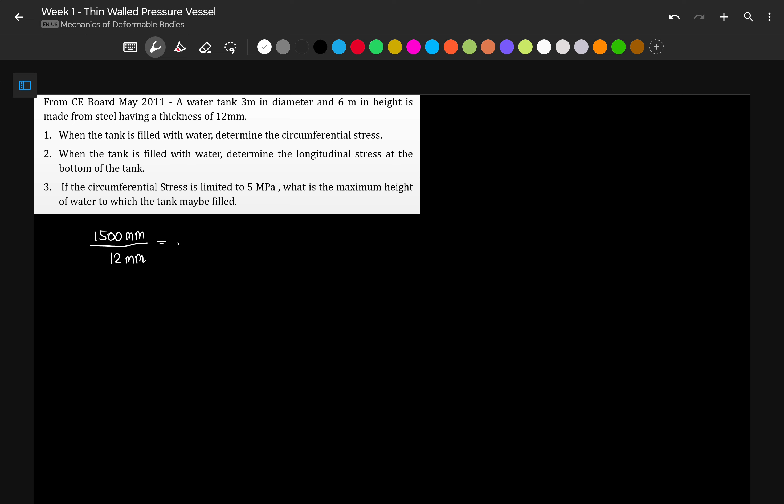So let's check the ratio of the radius to thickness first. Our radius is 1,500 millimeters and our thickness is 12 millimeters. That ratio is equal to 125, which is greater than 10.

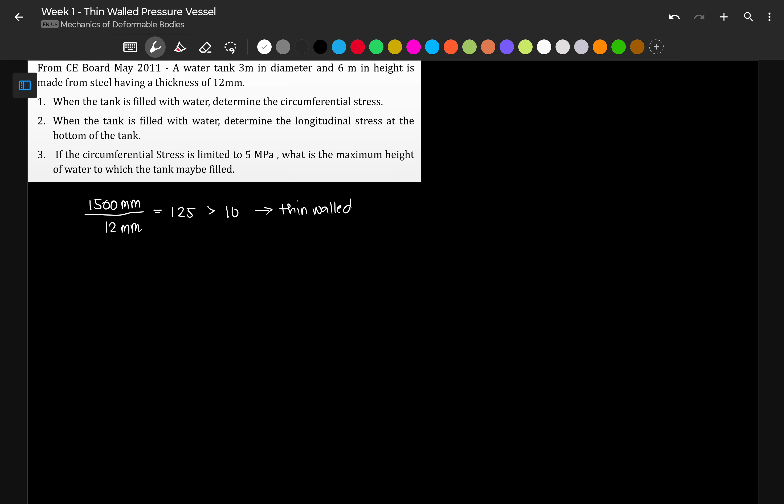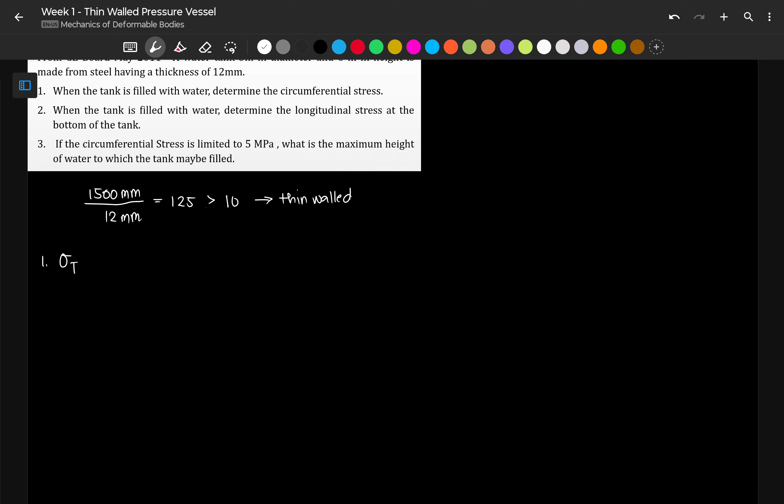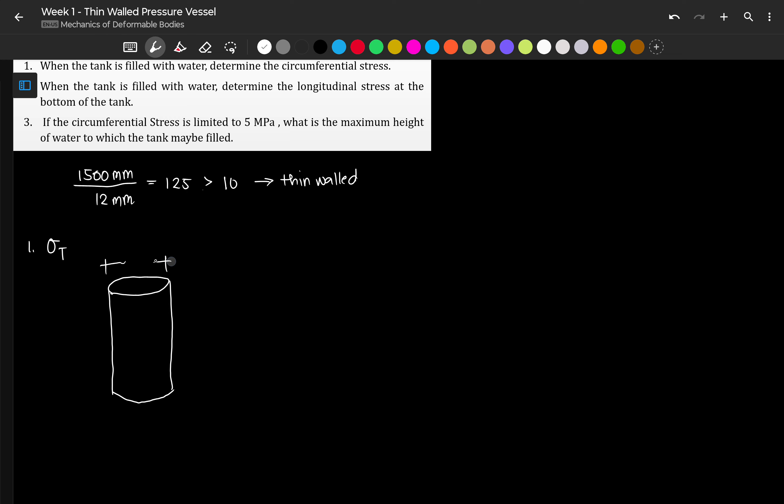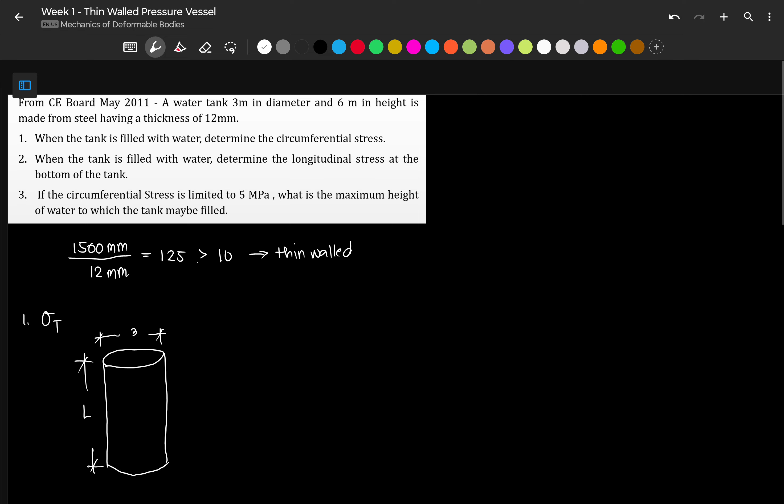Our water tank is cylindrical in cross-section. Because of the diameter, I'll draw the tank vertically. This is our tank. Again, the diameter here is 3 meters, and the length of our tank is 6 meters. So to see our transverse or tangential stress, we need to cut it longitudinally.

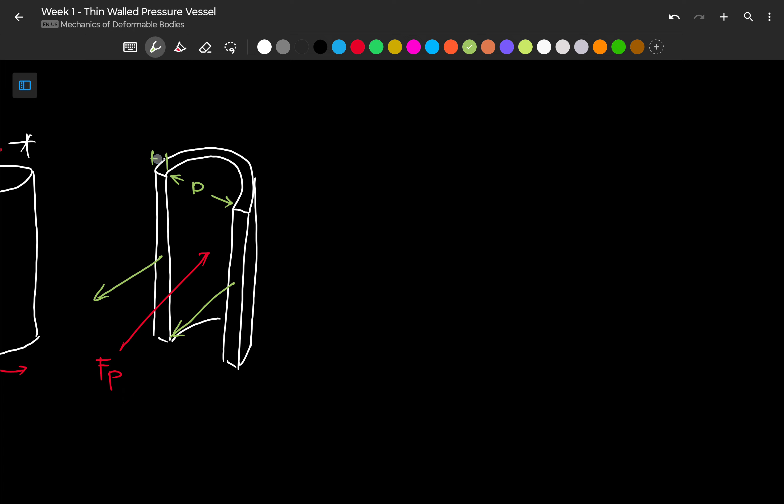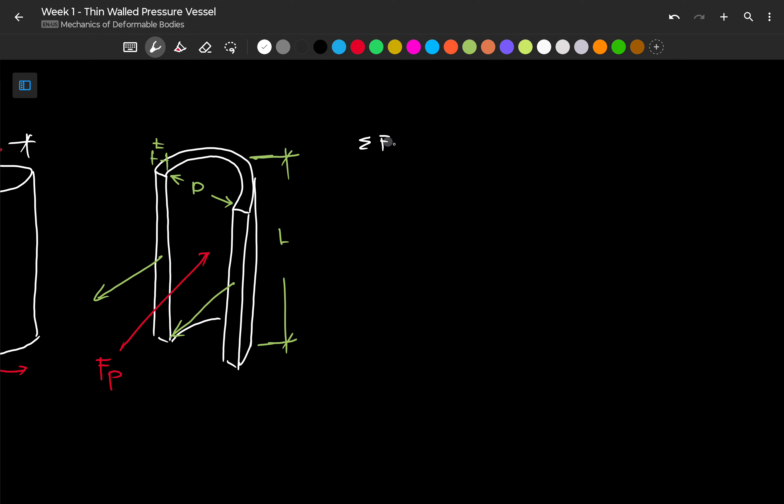By summation of forces horizontal equals 0, our FP, the force due to pressure, is equivalent to the two resistances R. So that's R and R.

Since pressure is force over area, the area we use is the area projected by pressure. So this area is for pressure. We can say that our FP is pressure times the area, which in this case is the diameter. Diameter is the width, and the height is the length.

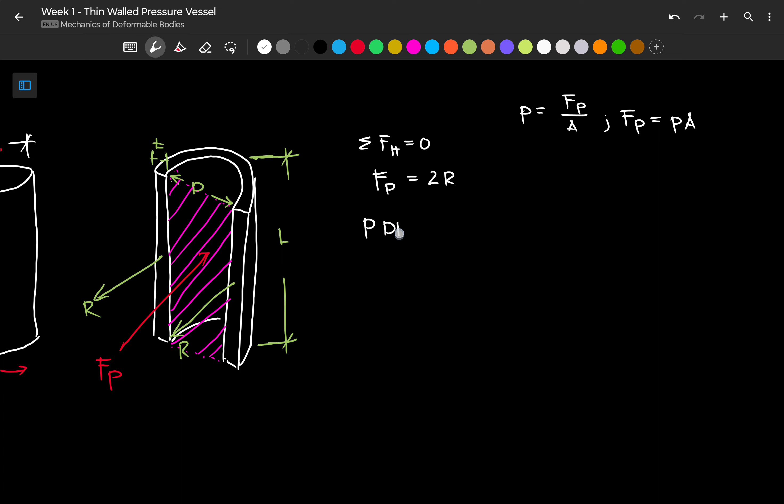So that's P times D times L, multiplied by the diameter and the length. And our single resistance, the area that resists so it doesn't burst, has a width of thickness and a height of L. So that's 2 multiplied by the stress on the tank wall multiplied by the thickness times the length. So our stress is equivalent to R over our area, over the thickness times the length. So we have sigma times T times L.

Cancel out L. Our tangential stress now is equivalent to PD over 2T. So we've derived it again.

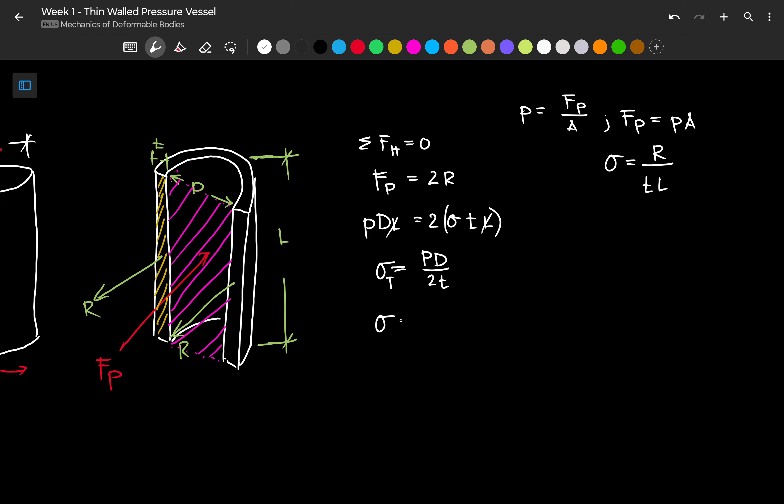So our tangential stress, according to the problem, has no given pressure, but it says filled with water. If it's filled with water, then our pressure is density times gravity times height.

So the pressure now, the density of water is 1,000 kilogram per cubic meter multiplied by gravity, 9.81 meters per second squared, and the height of water, 6 meters. So our P is 1,000 times 9.81 times 6, which is 58,860 Pascal, or 58.86 kilopascal.

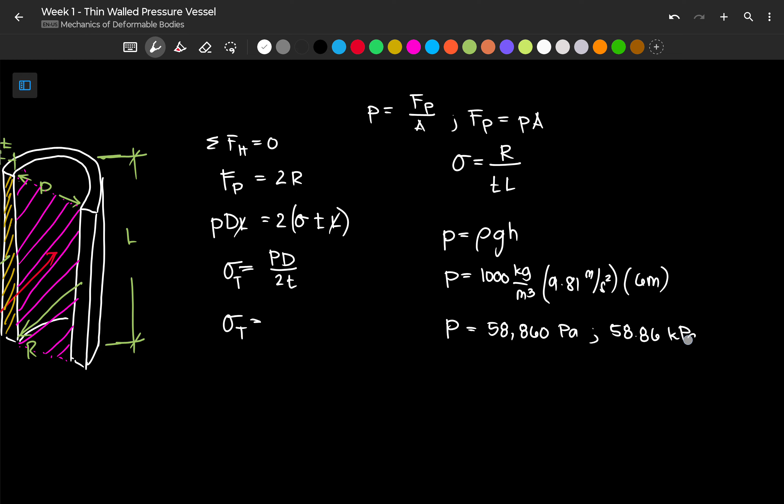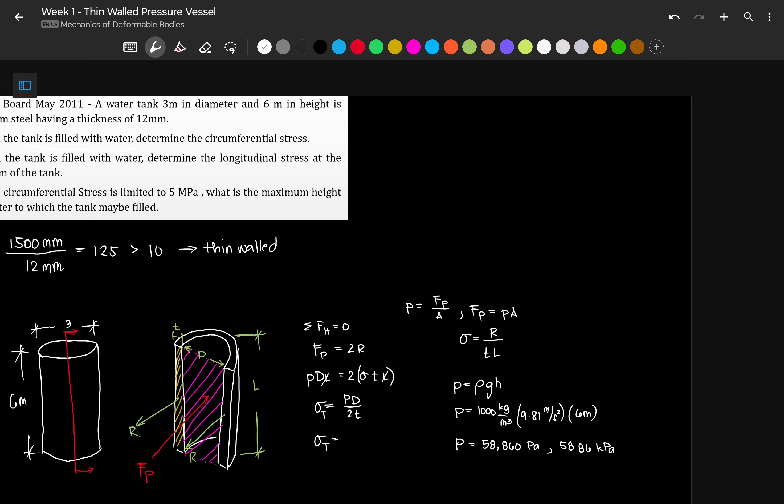Our diameter is in meters, and our thickness is in millimeters, so we have to be consistent with the units. We either go back to base units or convert everything to megapascal or Newton. Let's make our pressure in Newton per millimeter squared. So the unit is Newton per millimeter squared. This 58.86 is equivalent to...

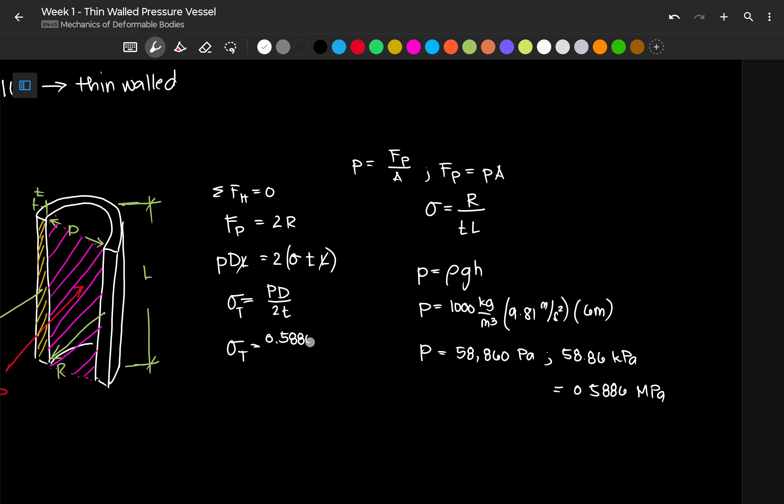0.05886 megapascal, or Newton per millimeter squared, multiplied by our diameter of 3,000 millimeters, divided by 2 times the thickness of 12 millimeters. So that's 0.05886 times 3,000 all over 2 times 12. We get 73...

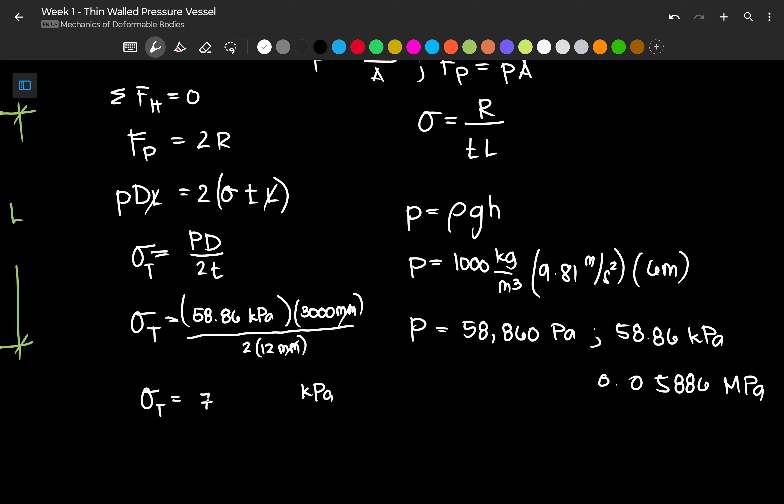7,357.5 kilopascal, or our stress is 7.357 megapascal. And that is our answer for this one.

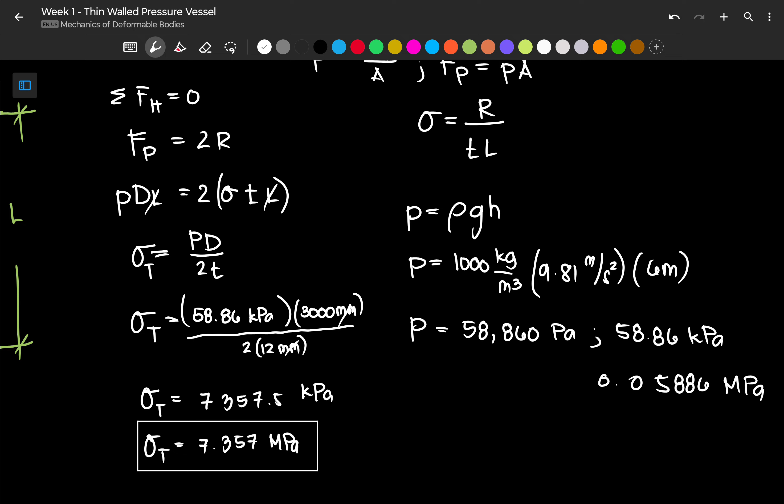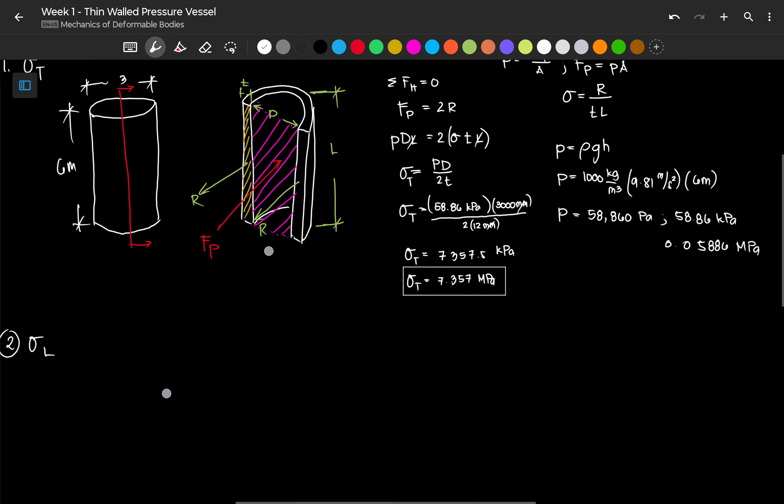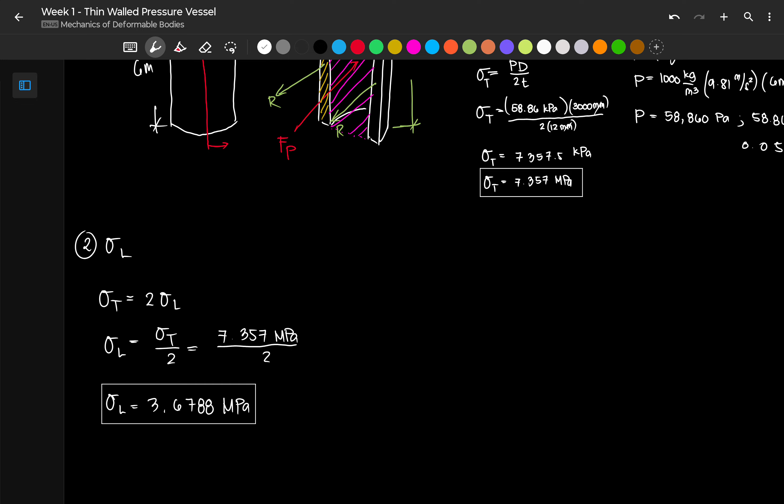Okay, let's proceed with the next question. The next question is about longitudinal stress. So as we said, the tangential stress is 2 times the longitudinal stress. So our longitudinal stress is tangential stress over 2, which will give us 7.357 megapascal over 2, or our longitudinal stress is 3.6788 megapascal. So this is our answer for this problem.

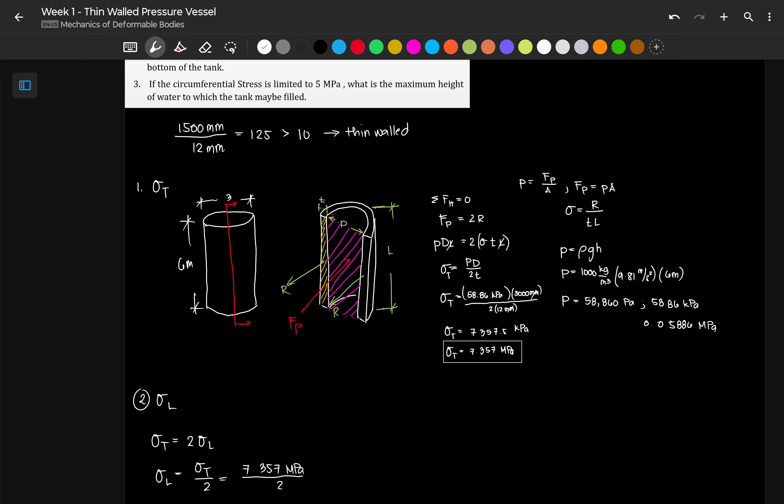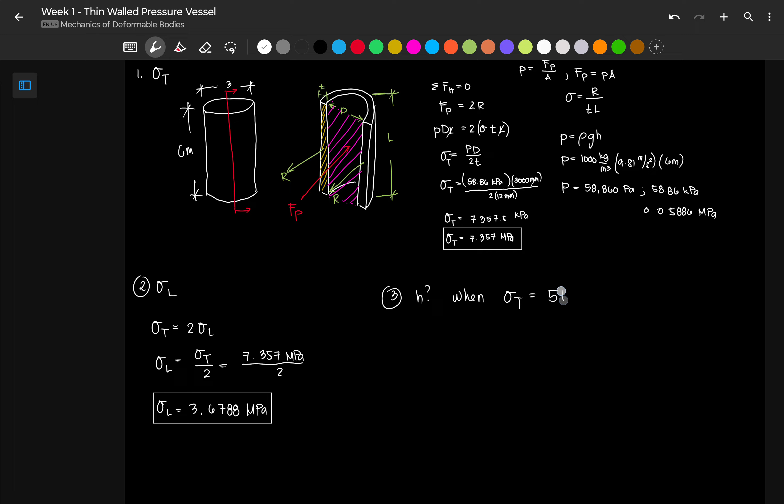Ay, sorry, there's actually one more. If the circumferential stress or the tangential stress is limited to 5 megapascal, what is the maximum height of water the tank may be filled? So what's being asked is the height of water when the tangential stress is limited to 5 megapascal. As we said earlier, our tangential stress is equivalent to PD over 2T.

But our pressure is density times gravity times height. Since we are limited to 5 megapascal, we have to convert it into pascal because the unit of this formula is pascal, so we have to be consistent. So our rho is 1,000 kilogram per cubic meter, our gravity is 9.81 meters per second squared, and our height is unknown, multiplied by the diameter, 3,000 mm, divided by 2 times 12 mm. So we cancel, and what remains is the meter inside this pressure.

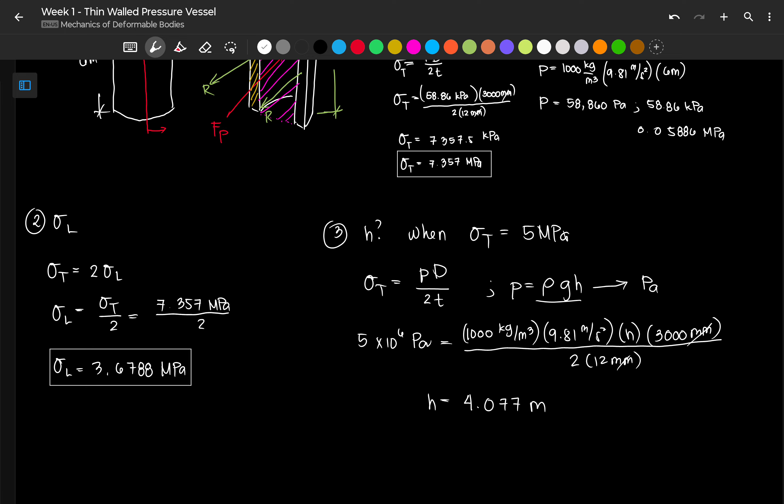So therefore, our height is: 5 times 10 to the 6 equals 1,000 times 9.81 times height, times 3,000 over 24. So our height is 4.077 meters. So that should be the height of the water so that it doesn't burst, if our pressure or our circumferential stress is limited to 5 megapascal.

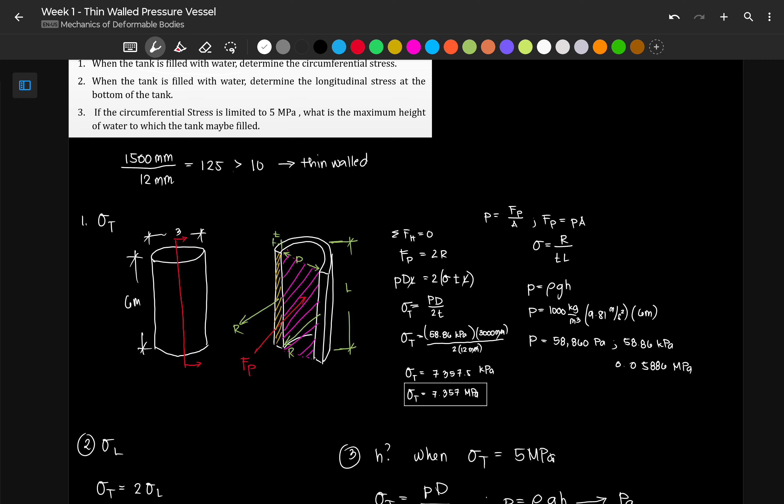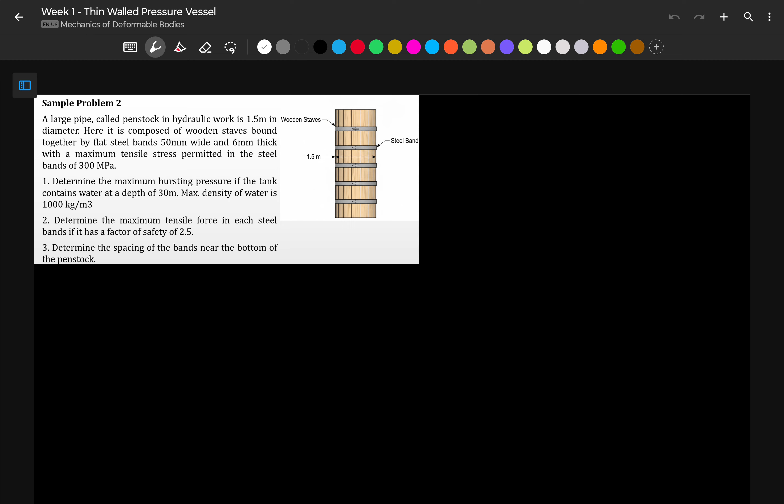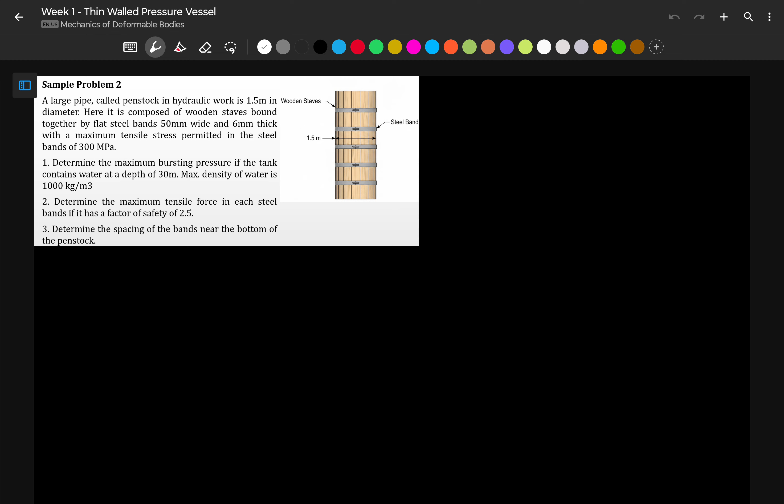Okay, let's proceed with the next sample problem. A large pipe called a penstock in a hydraulic work is 1.5 meter in diameter. Let's assume that's the inside diameter being referred to. It is composed of wooden staves bound together by a flat steel band 50 mm wide and 6 mm thick, with the maximum tensile stress permitted in the steel bands of 300 megapascal. Determine the maximum bursting pressure if the tank contains water at a depth of 30 meters. The maximum density of water is 1,000 kg per cubic meter. Then determine the maximum tensile force in each steel band if it has a factor of safety of 2.5, and then determine the spacing of the steel bands near the bottom of the penstock.

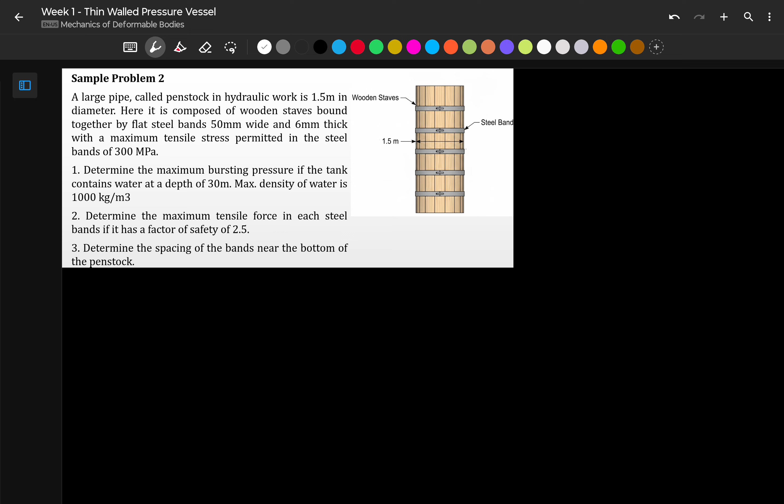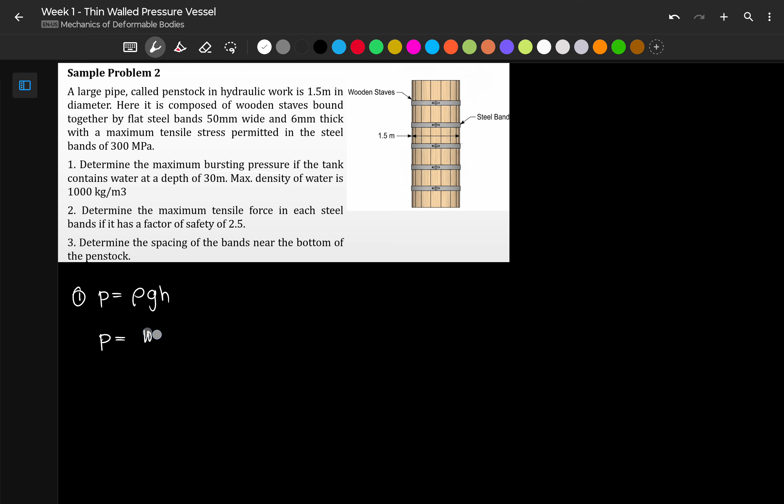So here, the question for number 1 is: what is the maximum bursting pressure when the water is 30 meters? So pressure is what's being asked, that is pressure equivalent to density times gravity times height. So our bursting pressure is the density of water, 1,000 kilogram per cubic meter, times our gravity, 9.81 meters per second squared, times our height, 30 meters. So this is in pascal: 1,000 times 9.81 times 30 meters equals 294,300 pascal, or our pressure is 294.3 kilopascal. This is our answer for this problem.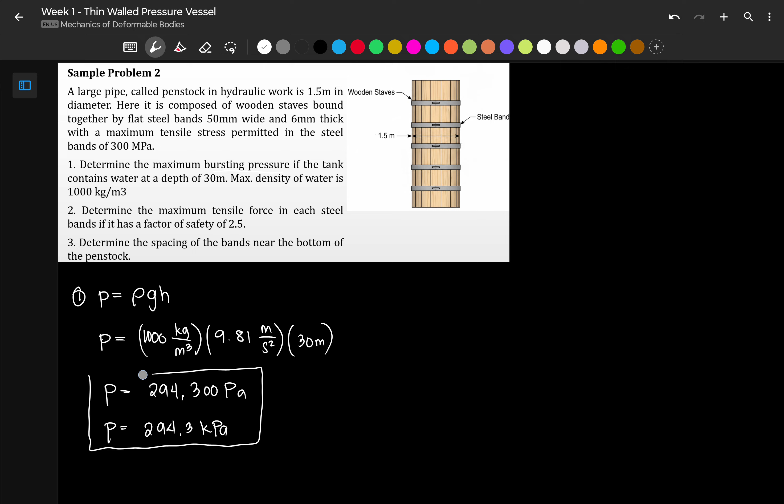So that's easy, right? Number 2 asks for the maximum tensile force in each steel band if it has a factor of safety of 2.5. So let's call the tensile force in the steel band T. That T is what we're solving for when the factor of safety is 2.5. Remember that our factor of safety is equivalent to the allowable stress over the working stress, or the allowable stress over the actual stress. So if our factor of safety is 2.5 and our working stress is 300 megapascal, therefore the actual stress should only be 300 over 2.5, which is 120 megapascal. This is the only stress our steel band should carry considering a factor of safety of 2.5. Although its capacity is 300 megapascal, we're not allowed to push it to the limit; we need to leave a factor of safety of 2.5.

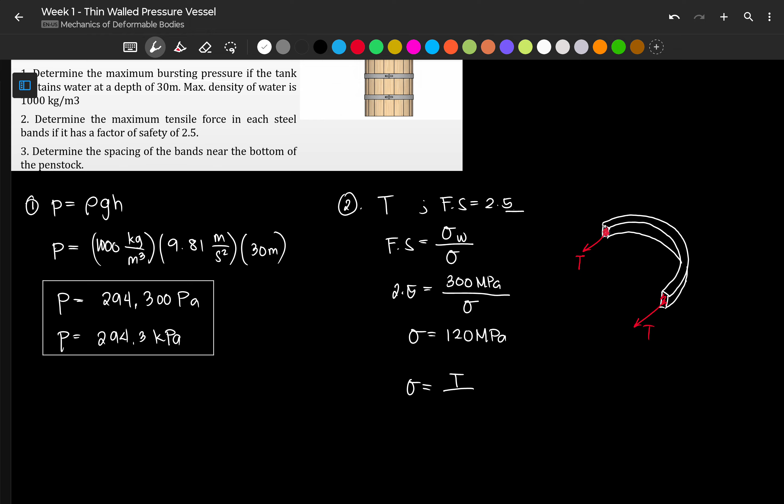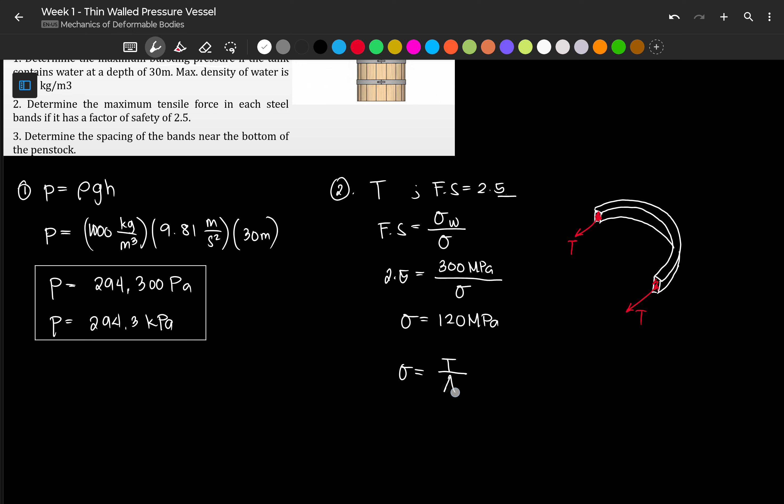Isa lang ang i-analyze natin, isang segment lang kasi equal lang naman yan. So, our force T or our tensile force T divided by yung area ng steel band. This is 120 Newton per millimeter squared.

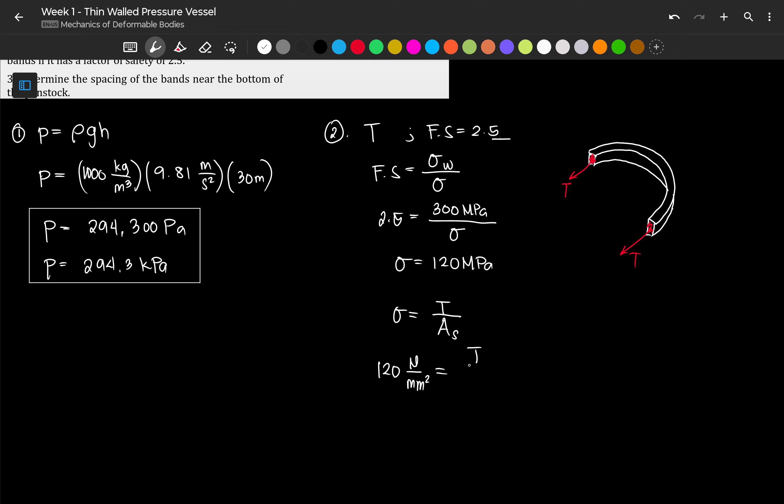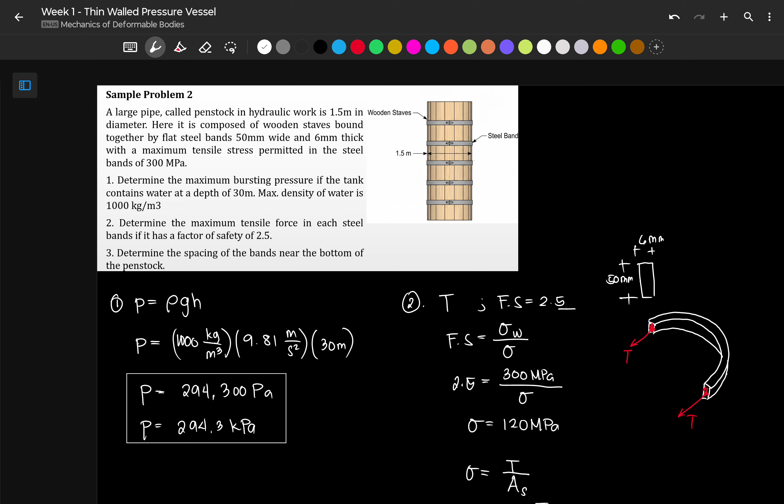Hinahanap sa atin yung tensile force or yung resistance ng steel band. And according to the problem, yung steel band natin, ang kanyang dimension ay we have 6 millimeter thick. Tapos, siya naman ay 50 millimeter wide. So, yan yung steel band natin. Ngayon, ito yung area na nagre-resist ng tensile force. So, this is 50 mm by 6 mm. So, cancel na yung mm.

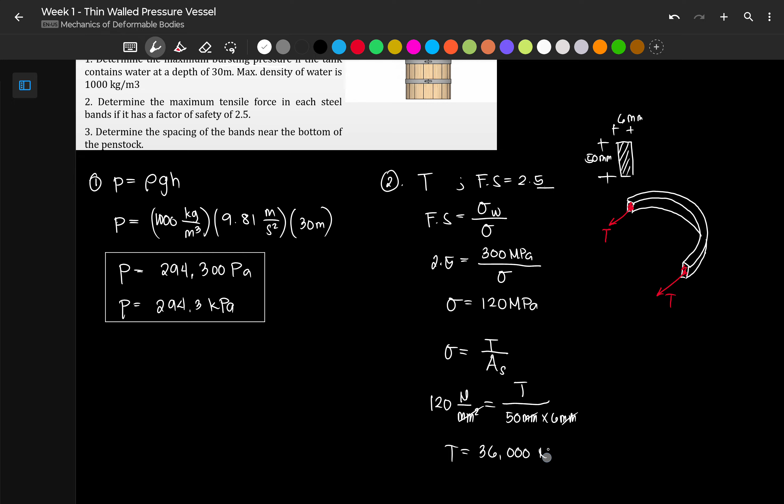So, we have 120 times 50 times 6. We have 36,000. So our tensile force is 36,000 Newton. Or this is T is equal to 36 kilonewton.

So ito ngayon yung force na kine-carry ng steel band considering a factor of safety na 2.5 and a working stress na 300 megapascal. Next, the last question is, ang tinatanong sa atin, determine the spacing of the bands near the bottom of the penstock.

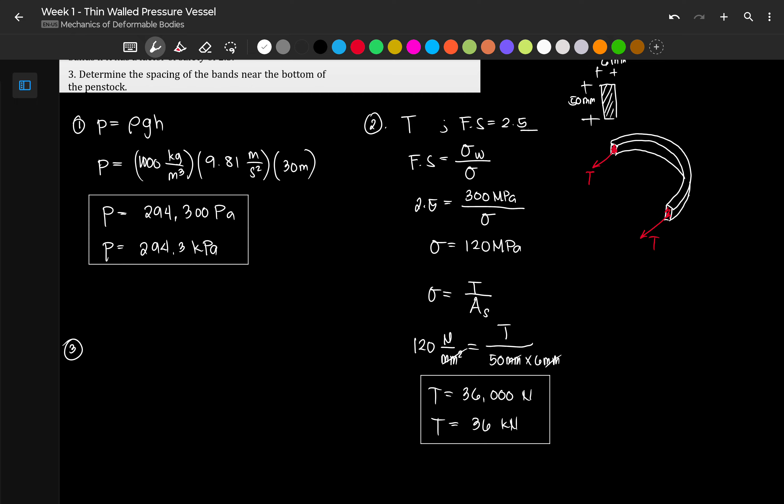So, kung ito yung bariles natin, ang tinatanong sa atin, gaano daw kalayo yung pagitan nung bawat steel band.

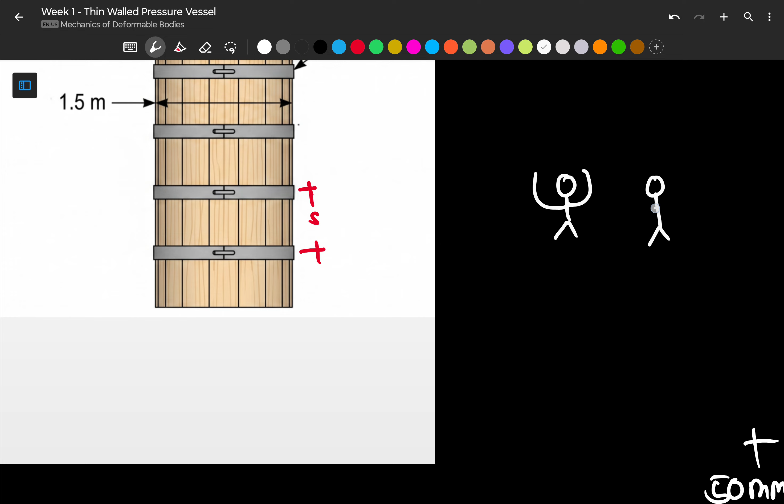Okay, so ganito. Kung ako yung steel band, imagine niyo meron tayong tatlong tao. Si tao 1, si tao 2, saka si tao 3. Silang tatlo, may buhat-buhat na log. Okay? So sabi, dapat equal ng buhat kasi equal naman yung spacing nila.

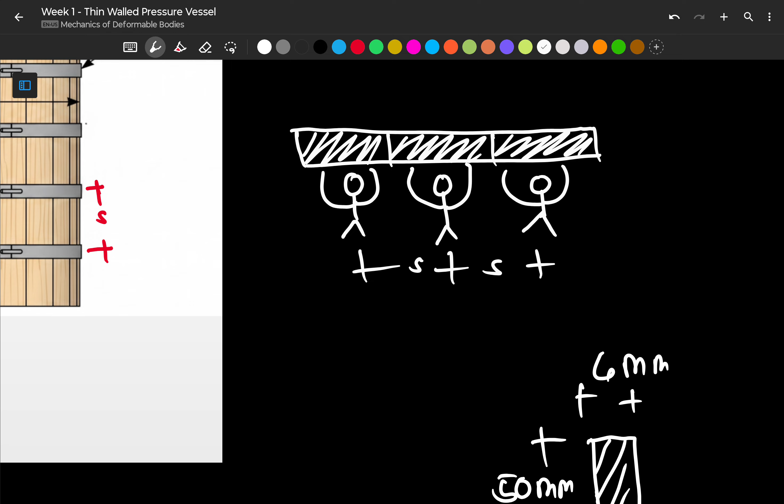So, si tao 1, ang nire-resist niya ay, so hatiin natin sa tatlo, ang nire-resist niya ay ito. Si tao 2, ang nire-resist niya ay ito. Si tao 3 naman, ang nire-resist niya ay ito. Okay? So, dapat equal daw sila. So, in this case, ang proper location of our spacing is yung mga center to center nung ating mga span.

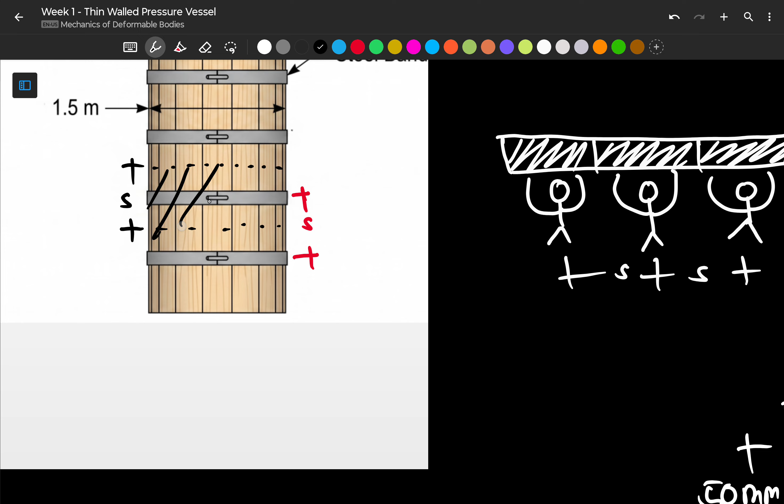So, ito yung area na nire-resist ng steel band na ito. Okay? So, yan yung area niya. Kung ito-draw natin, wag na, yan na pala, nakadrawing na. Okay? So, therefore, pag nag-analyze tayo ng problem, kung i-analyze natin yung ating penstock, pag kinat natin siya, daming drawing.

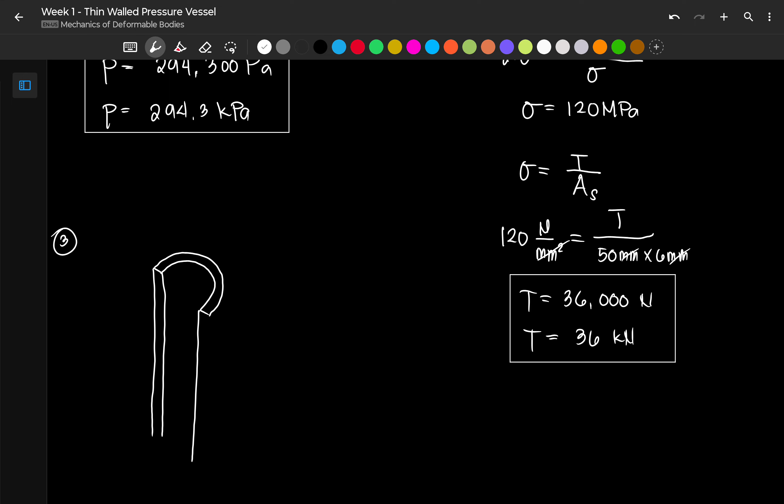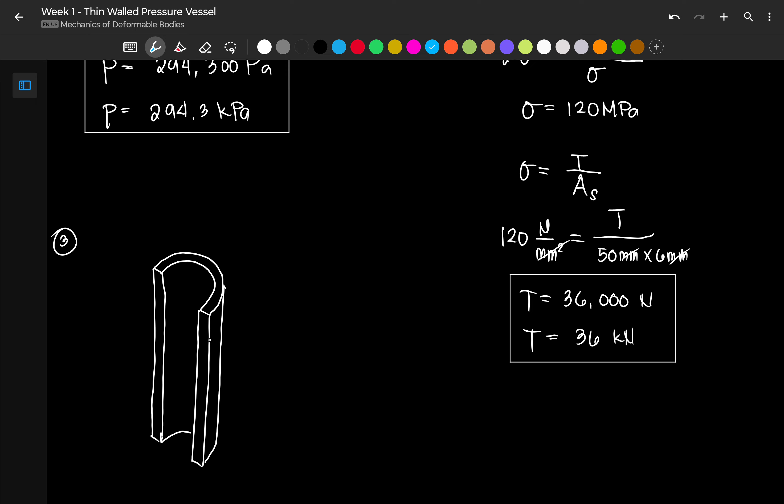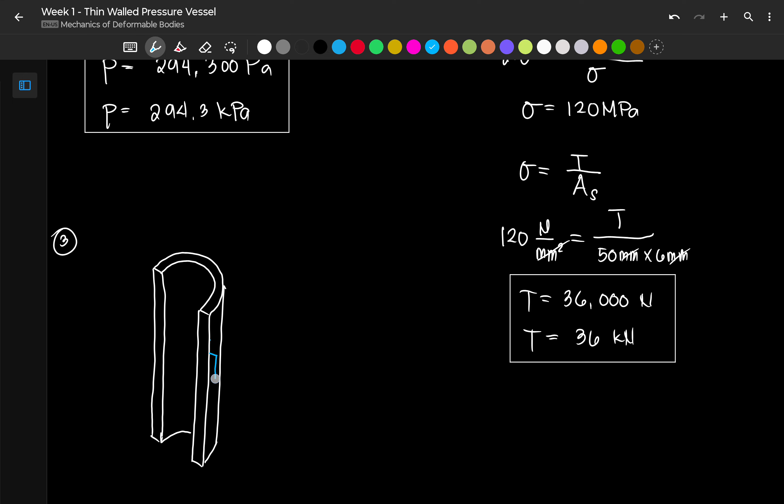Then, lagyan natin siya ng steel bands. So, dito, meron tayong steel band. Okay, then, another steel band dito. Ano nai-imagine ninyo?

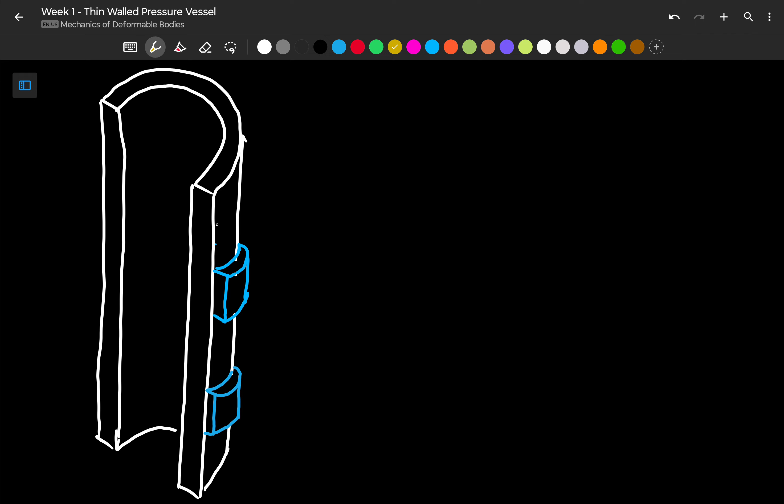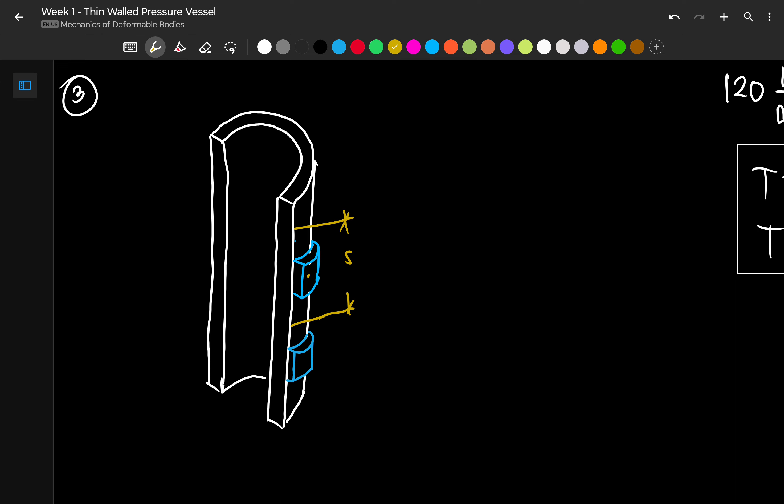So, ang kine-carry ng steel band na to, dito, ito mismo, ay yung spacing S lang. Okay? So, yung nagke-carry nung ibang band nung ibang span ay ibang steel band na. Okay? Now, so mangyayari dito, yung steel band natin, since di ko pala na-drawing yung sa kabilang side, ito na lang isa i-draw ni sir. Yan, para mabilis.

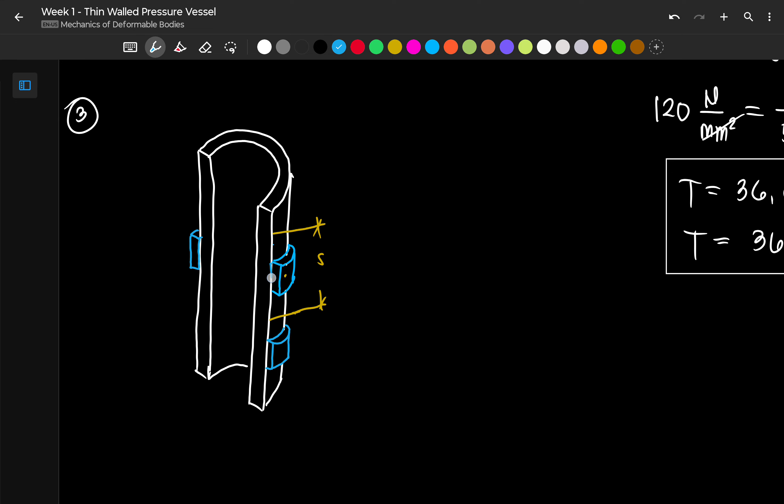Yung steel band natin dito, may nire-resist siya dito na force due to pressure. Tapos ito namang ating steel bands, sabi natin kanina, yan ay under a tensile force na nakuha na natin kanina. So in this case, yung force due to pressure na nire-resist niya ay yun lang sakop niya. So, ito na lang yung force due to pressure niya. Okay? Kasi, yung ating other force due to pressure sa kabilang side, nire-resist na yan ng ibang steel band. Okay? So, ito lang yung coverage niya. Yan lang ang sakop niya.

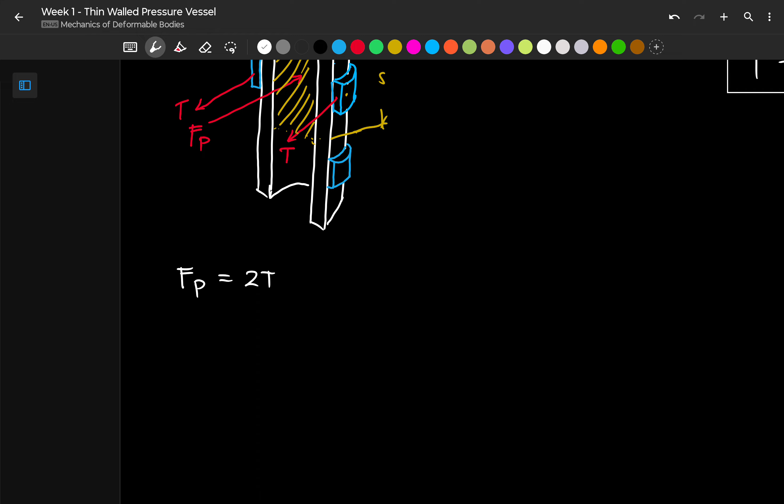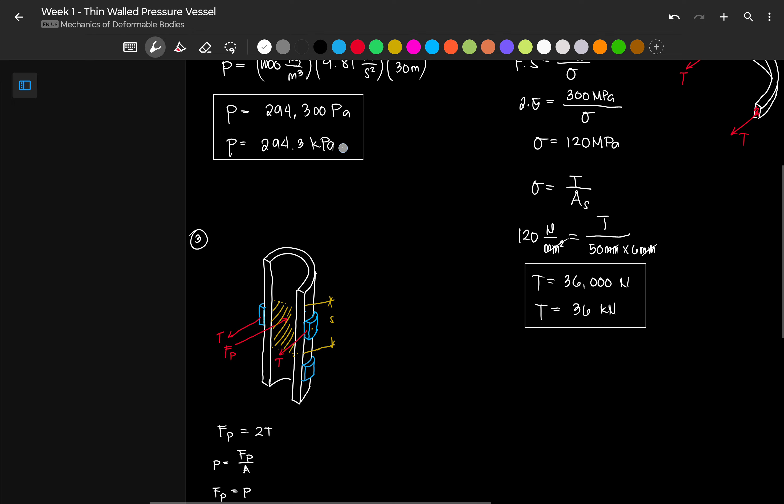So, again, we have FP is equal to 2T. Na-compute na natin yung tensile force doon sa ating material. That is 36 kilonewton. So, the force due to pressure nga, sabi natin, pressure, sir, is force over area. So, therefore, our FP is the pressure, okay, which is we already solved, multiplied by the area.

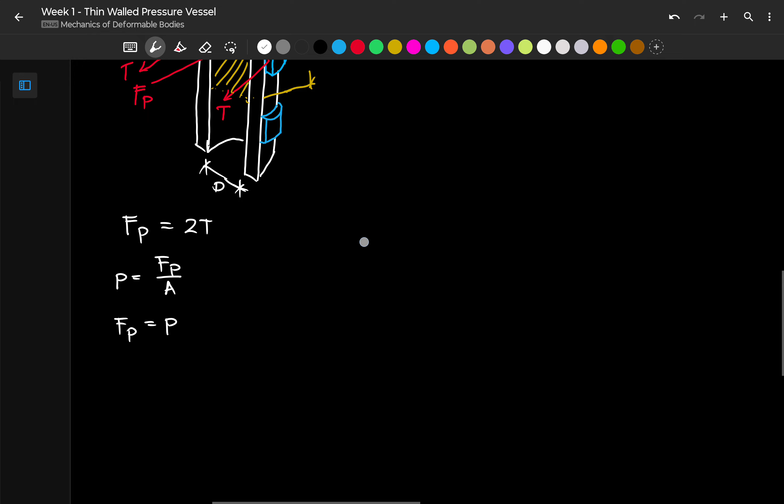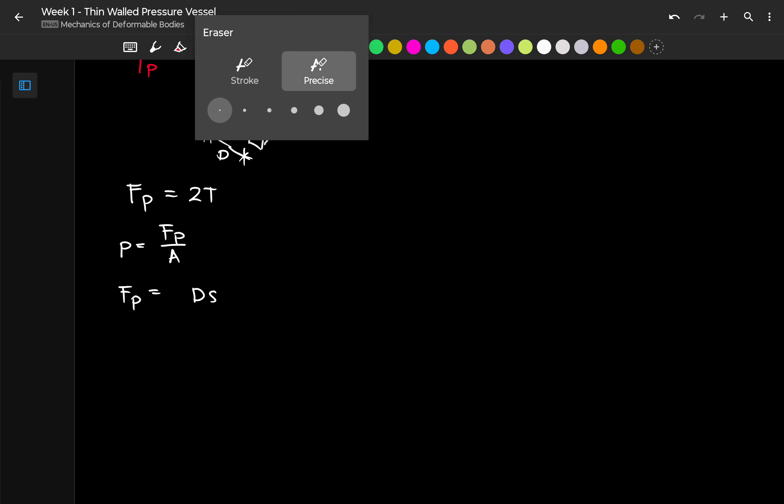Ang area na lang ngayon na ina-applyan natin ng pressure, if this is the diameter, is diameter multiplied by S na lang. So, the area is diameter multiplied by S. So, therefore, our FP is P ds. Ba't ba malaking P yung pressure ni sir? Maliit na P lang dapat si pressure. So, P ds equivalent sa 2T.

So, our pressure, according to the problem, is 294.3 kilopascal. Since naka-kilopascal ito, gawin natin munang Newton meter lahat para hindi tayo mahirapan. So, times 10 raised to 3 Newton. This is our pressure, Newton per meter squared. Our diameter is 3 meters.

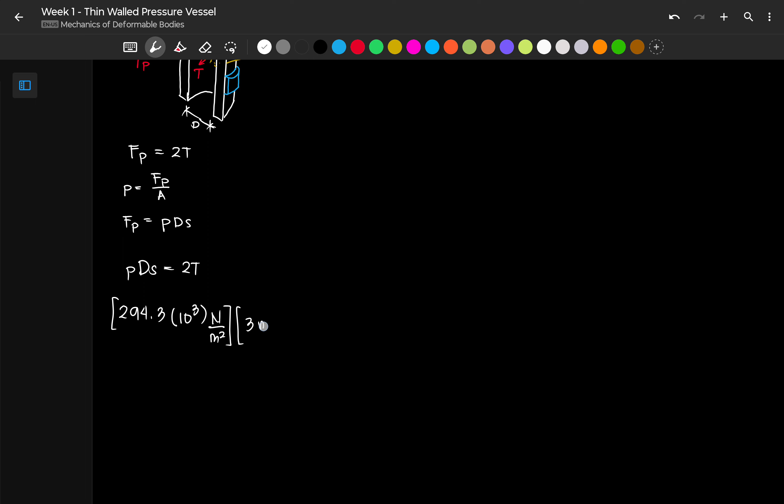Hinahanap natin yung length S. And our tensile force is dalawang 36 times 10 to 3 Newton. Okay? So, cancel na to. Cancel ito. Matitira sa ating S in meters. And that is 0.163 meters. Or S is 163 millimeter.

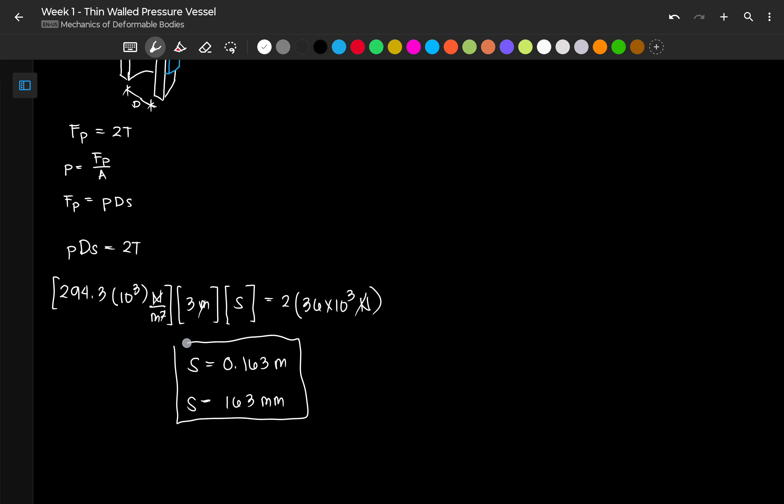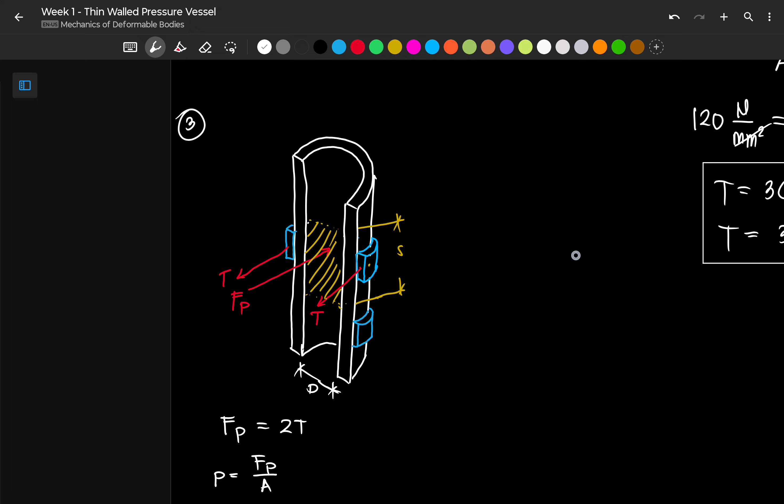So, this should be the spacing of our hoops at the bottom of our tank. Take note dito, na-compute natin yung spacing dahil hinati natin yung pressure. Ang nire-resist lang na pressure ng isang steel band ay yung sa spacing S. Hindi niya na-covered yung sa ibang steel band.

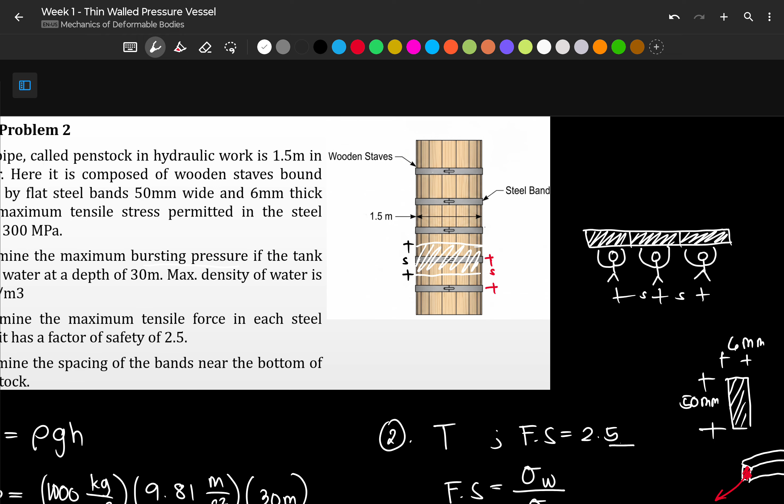Ito lang yung kanya. Okay? Yan lang. So, yan lang ang kine-carry nung ating hoops. Ay, ba't ba ganun? Yan. So, yung area lang na yan, under the spacing. Okay? So, let's proceed with the next two problem, but let's continue that on a next discussion.